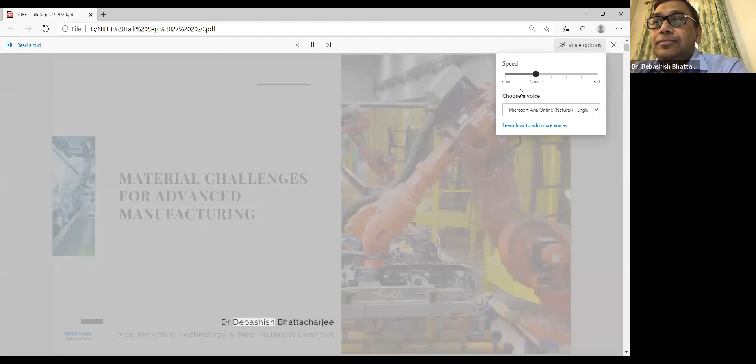Nice, I hope you can see this. Material, challenges for advanced manufacturing. Oh, Dr. Debashish Bhattacharjee. That wasn't my voice.

Yeah, we are all set to go, sir. That is okay, don't worry. Don't worry, that's the least of the problems. Okay, yeah, bye.

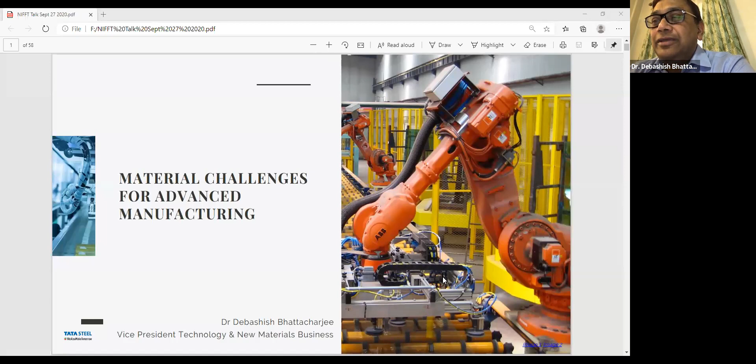So most of my coverage will be on how manufacturing, the initial part will be on how the whole chain of manufacturing is changing, because manufacturing is not for the sake of manufacturing, it is to generate wealth. And manufacturing is a part of the whole value system, the value chain that generates wealth. The first part of the talk will be to see how that whole chain, the value chain, is transforming itself.

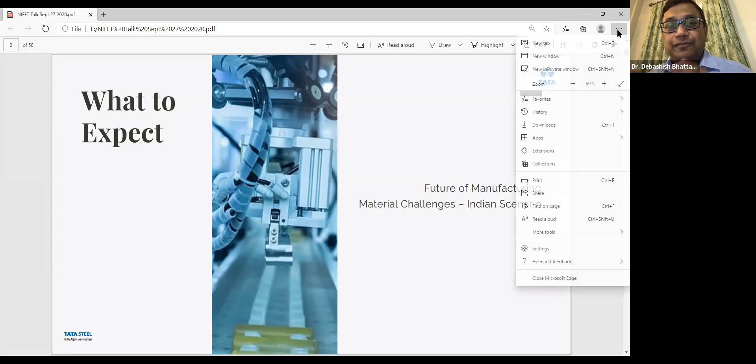And then we will go on to talk about certain specific materials and the challenges in the manufacturing, also some of the advanced materials, advanced manufacturing technologies, and the challenges specifically with reference to the Indian context. And we'll end up by talking about what we can possibly do. There may be multiple ways forward, I will just talk about maybe a few. Okay, next one please.

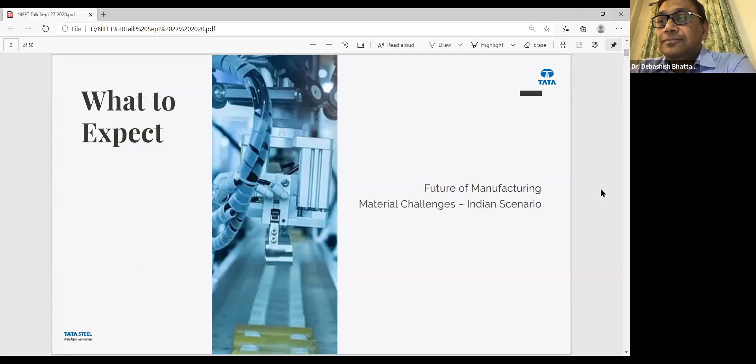Yeah, thank you. So the way manufacturing is transforming today, it can be clubbed in many ways, described in many ways, but I put it under 4 trends, 4 mega trends if you wish. The first is consumer demand itself. The nature of consumer demand is changing, and it has changed over our lifetime.

And I'm talking about people who are above 50, above 55, who started, who were young when mobile phones were not in existence. We used to wait for a couple of years before we even got a landline phone. So that generation has seen multiple transitions in the nature of consumer demand. We were happy if we got a phone connection in 2 years. Today, people change 2 phones in 2 years.

So that is one of the indicators of how manufacturing technology has changed and how consumer expectation has changed. If an app doesn't update itself every couple of months, we think probably the company is dead. The nature of products themselves are changing, it's changing in what it's offering. I'll talk a little more about it later.

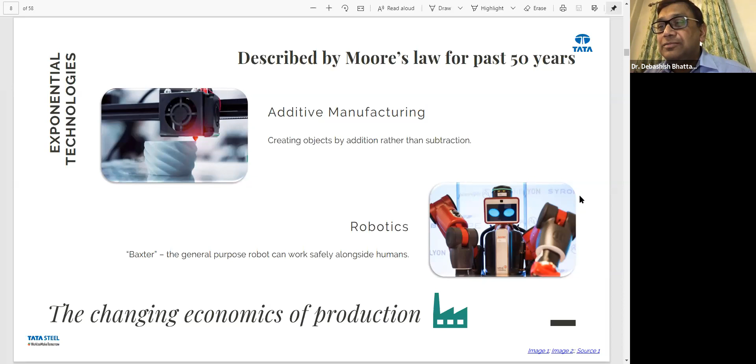And enforced by all of this have changed materials. Most of the stuff we see around us today are multi-materials, and progressively more and more advanced materials. If you take a car today, say an Audi A6 or a BMW 5, you'll see the extent of use of multiple materials has increased dramatically over the last 10, 15 years. An ambassador used to be made of basically just the skin, 2 or 3 types of steel. Today there's no ambassador, but a decent mid-range car will have steel, aluminum, polymers, composites, steels of at least 5 or 6 different grades. You'll have coated, uncoated. And this is just a car.

And if you look at the transition that has happened in telecommunication, in just the handheld telephone, the materials used inside has ballooned over the last 15 years, partly driven by Moore's law. So we'll talk about material science a little more later.

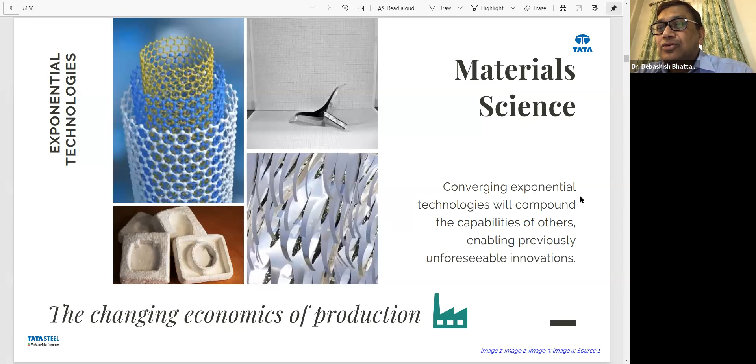And of course, all of this has been aided by internet. Although we had a problem getting into Zoom, but this is the way forward. We've seen, whether meeting amongst friends or having official meetings over Zoom or Teams, this is how people are very conveniently interacting and exchanging information. They're also exchanging information on manufacturing, where you can have a concept and design at one place, manufacture at a completely different place, in small scale or even large scale. Distances have crashed, and the production chain from concept to design to manufacture to market has transformed from what we had, say, 10, 15, 20 years back.

Next one, please. I'll give you an example of Tata Steel's own experience in the new materials business, which we started 1.5 years back. We started exploring the business 1.5 to 2 years back, and went into business 1.5 years back. Without any investment in asset, without any asset ownership, this business has grown 10x over the last 18 months. It has designed products, ridden on existing products, introduced completely new to the world products in sectors of industry, infrastructure, and railways. Having a growth rate of 10x in the first 18 months without any capital investment shows that there are now business models possible which are eroding away barriers to entry. In the yesteryears, you couldn't have started a materials production business without capital investment. Today, you can. This business is growing very rapidly today, and similar models are applicable across the group, across the globe, in multiple materials.

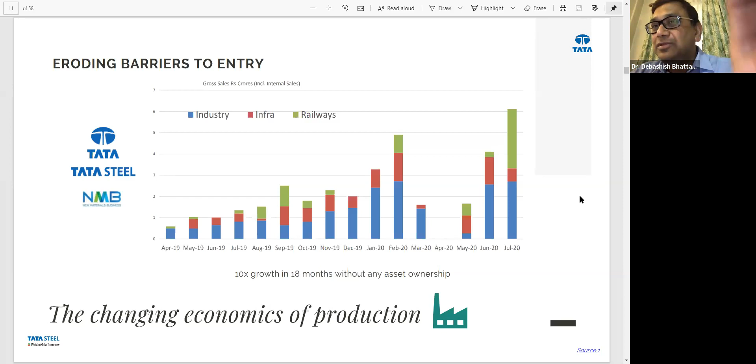So we'll now look at individual materials and see what can be done in the Indian scenario from the production and manufacturing perspective, to make India self-reliant and a world leader in those materials. Of course, the materials chosen are either of strategic nature or of a nature which would take India to a leadership position in materials that are emerging and have tremendously high applicability in multiple areas. So we'll start with titanium.

We'll start with titanium, which is a strategic material. India has the third largest ore deposit of titanium, which is in the beach sands, mostly in the southern part of India, but it works its way up the east coast. Having the third largest deposit in the world, India makes 500 tons of titanium in a plant, a plant which is owned by the government, not necessarily the central government.

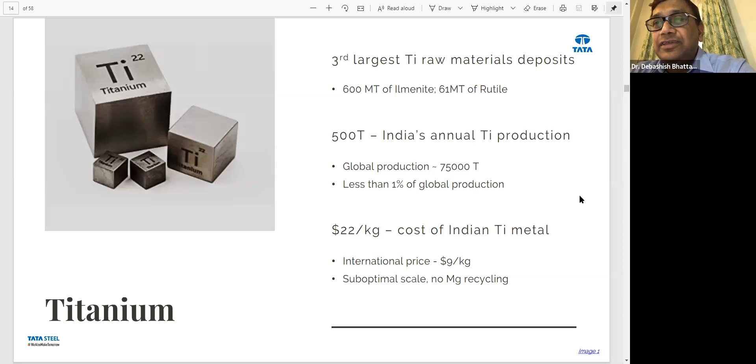And so, of course, it is driven by composites. The use of composites, especially carbon fiber composites, has gone up to about 50% in the newer aircrafts. And of course, carbon fiber famously does not go along with aluminium because there's a corrosion issue. So the choice for a metallic goes to titanium, where the demand for titanium has risen, driven by aerospace.

And if India wants to become a hub and wants to make its own military aircraft, or also civilian aircraft, maybe small versions, this is the way forward, and we need to have our own titanium, along with carbon fiber, which I'm going to talk about later.

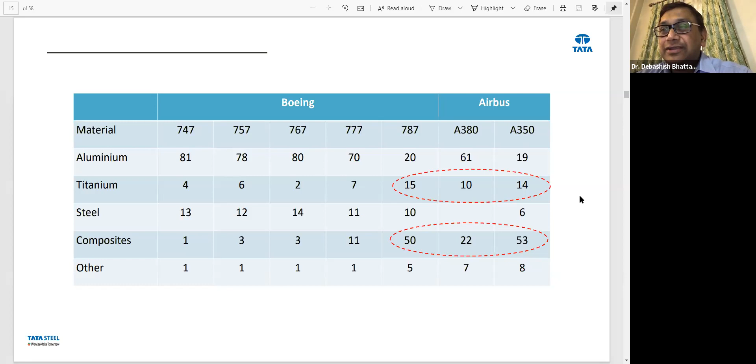Next one, please. Now titanium, of course, has this for the metallurgists here who understand the alloy phase diagrams. Like steel, and unlike most of aluminium, titanium has a very flexible phase diagram, which means that you can give titanium different properties, strengths, hardnesses, ductilities by giving different heat treatments and having different precipitates, different phase combinations.

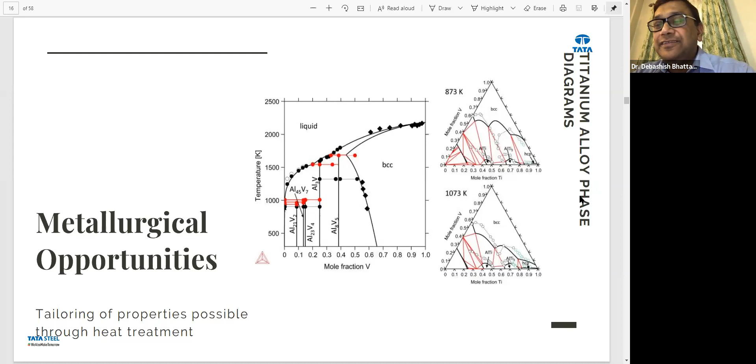Next one, please. So it's a very versatile material, therefore. But then its price has to come down through scale, through a manufacturing route that can bring down its cost of production. But for that, India needs to invest in intellectual capital, in research capital. These are some of the products that India could design, develop, and manufacture and sell to the world, either from the health sector or in the aerospace sector.

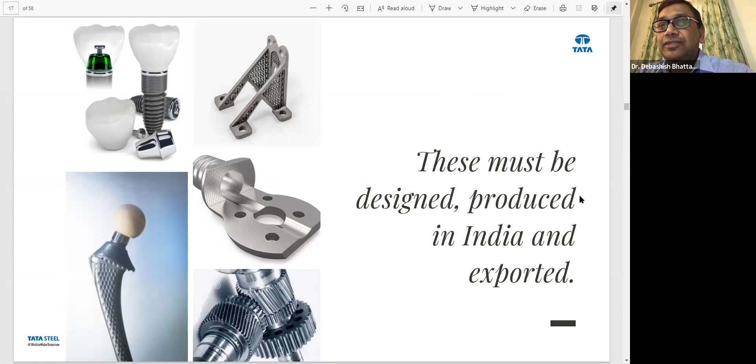Next one, please. But if you look at that value chain of titanium, you start with basic knowledge. There are hardly any academic groups in India which work on titanium. There are some pilots, and I would think a 500-ton plant is more than a pilot, it's a commercial plant, but it's not really commercially viable. It's a big pilot plant. So we have experience in running plants and pilots in titanium, but there is lack of basic knowledge and basic research in titanium. Manufacturing, we need scale.

But the whole point is that the market in India is not big enough to pull this whole value chain. The Indian aerospace and medical sectors are weak in terms of the amounts that they manufacture, that they make. So they need to pull. Therefore, our focus, in order to have a natural pull in this material, is to create the market.

Of course, creating a market in India would be difficult, would be slow. So maybe we should transform our vision from being India-centric in our market to being globally focused on the market. So we could make in India for the globe. And that is the way by which we can pull this whole value chain of titanium toward demanding more amounts of titanium, which could mean scaling up in India, which would mean requirement for qualified engineers, requirement for intellectual research and technology inputs, which would mean development of research groups in the academia.

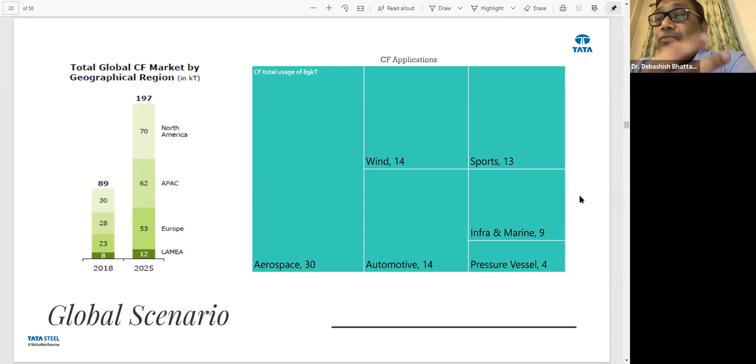Carbon fiber is another strategic material. In 2018, the world made about 90,000 tons, and with new plants being set up, it will grow to about 200,000 tons by 2025. Most of it is used in aerospace, as with Boeing and Airbus, where the whole fuselage is turning into carbon fiber.

It's also used in automotive and wind. As windmills increase the length of their blades, they would no longer be made of glass fiber. Anything above 80 to 90 meters would have to be carbon fiber to reduce weight on the bearings.

Automotive use is price sensitive, but as prices come down, uptake in automotive will increase. In my opinion, if the price of carbon fiber comes below $10, it will have significant uptake in automotive, and once there's volume uptake, there will be further decrease in price. And sports.

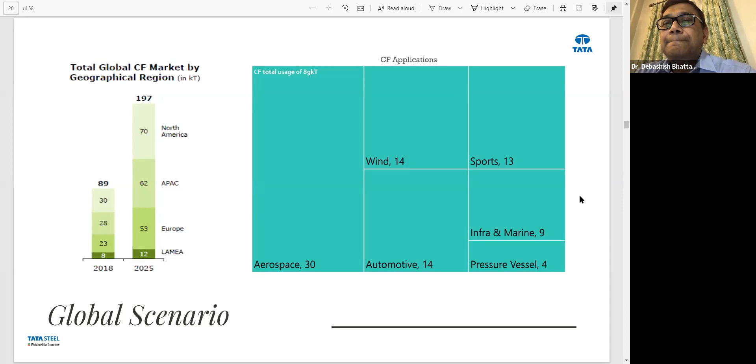If you see the Indian picture, India consumes today about 750 tons. The M is not million, it's just metric. So 750 tons out of, say, 100,000 tons globally—again, less than 1% of global consumption. That's not surprising, it's the same story as titanium.

The users of these strategic materials—our aerospace market is small, and the automotive or wind market, compared to the rest of the world, is small. Most of the wind blade lengths we use are sufficient to be designed and manufactured in glass fiber. So overall, this material's consumption in India is less than 1% of global consumption.

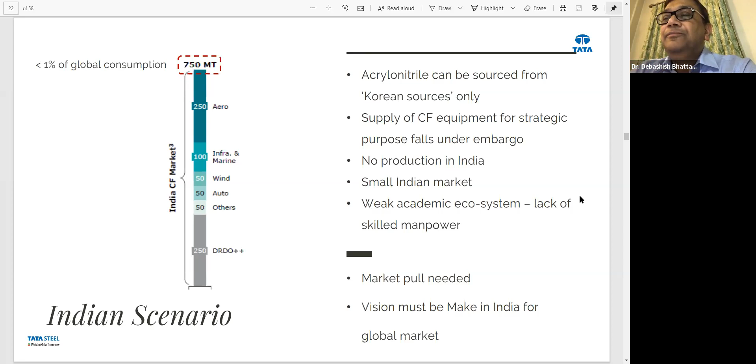With this sort of market in India, there's no way we can have large-scale production, or any company setting up large-scale production for the Indian market alone. So the answer here is that if we want to be self-sufficient in this strategic material in a self-sustaining way, we need to create the pull—partly by manufacturing aircraft components in India, increasing manufacturing of aircraft in India, or treating the globe as our market.

India has certain inherent disadvantages in this material. One key issue with traditional carbon fiber is that it uses acrylonitrile, whose raw material is mostly imported, although it can be made from petroleum as a byproduct, but it has some specific sources. Our academic support system in this material is also weak.

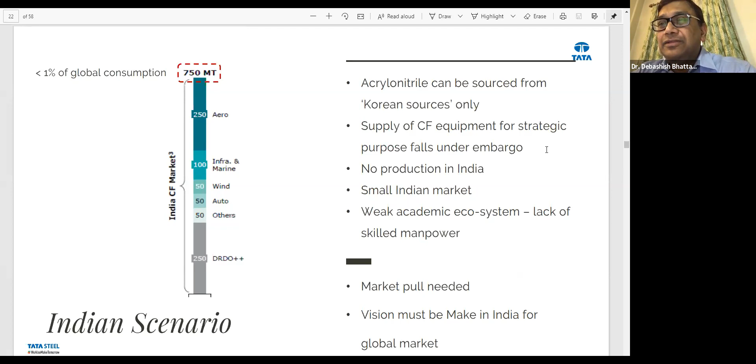There are various levers India can use to address carbon fiber and be globally competitive. The largest part of the cost of carbon fiber is in the polyacrylonitrile, PAN, the raw material. There's also a power cost and a manpower cost. On PAN cost and manpower cost, India should be able to create a differentiation. Let me talk about PAN.

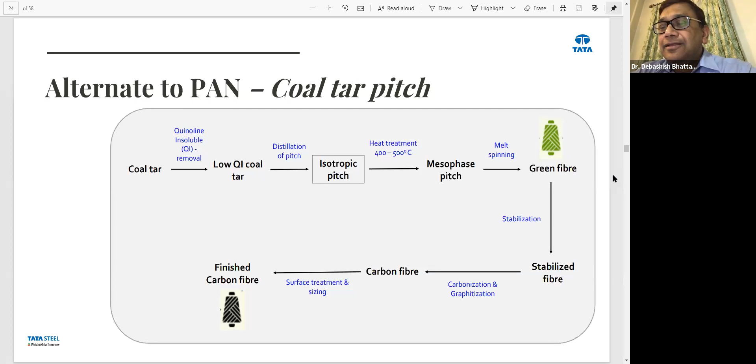A big issue in composites is recycling. There are technologies which India can adopt, adapt, and develop for reusing and reclaiming carbon fiber, either from unused prepregs—pre-resin impregnated fibers—by chopping them into small pieces and giving them an in-mold treatment to make products for automotive, railways, and other sectors. If we master this technology, we can be a world leader in an area that's really waiting for leadership in recycling of composites.

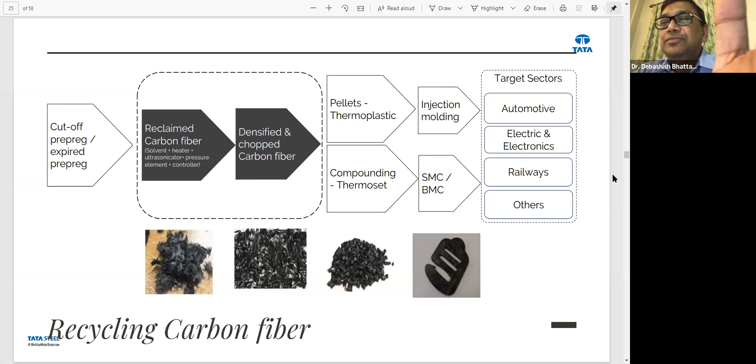These are some of the components which can be made from recycled carbon fiber. You can make automotive seat backs, car hoods, oil pans, or sandwich panels. These need not always be exposed surfaces—they can be internal surfaces with the same strength and lightweight properties you'd need, but at a much lower cost. So we could use recycling technology to our advantage to make carbon fiber products at a price point that can lead to a large market for carbon fibers.

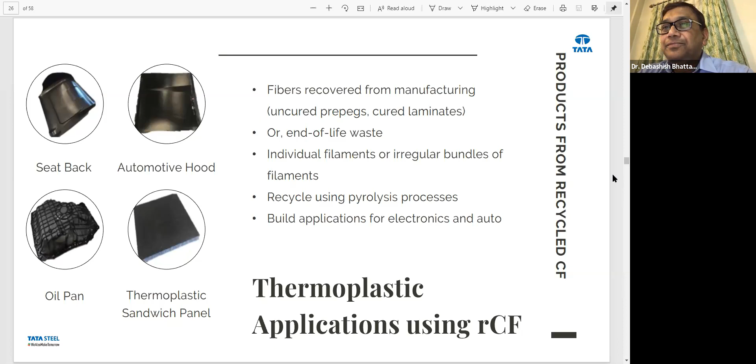If you look at the same value chain of carbon fiber as we showed for titanium—basic knowledge—there's hardly any group in India working on the fundamentals of carbon fiber. There's a pilot plant available only in NAL, Bangalore, and that's been there for a couple of decades, trying to get hand-holding from industry but not very successfully. There's no big manufacturer in India of carbon fiber. It's not that attempts haven't been made, but they haven't succeeded, and one of the biggest hindrances is the lack of market. Again, the same story as in titanium—we need to think of the globe as the market, and then see how that market pulls and how we can create a manufacturing base in India that enables us to make this very strategic material.

Let's touch upon magnesium, another strategic material. 85% of the world's 1 million ton production of magnesium is from China, and it predominantly uses the Pidgeon process, which is environmentally unfriendly. It guzzles energy and is a process that many countries wouldn't allow simply because of its adverse environmental footprint. But lo and behold, 85% of this material comes from only one country.

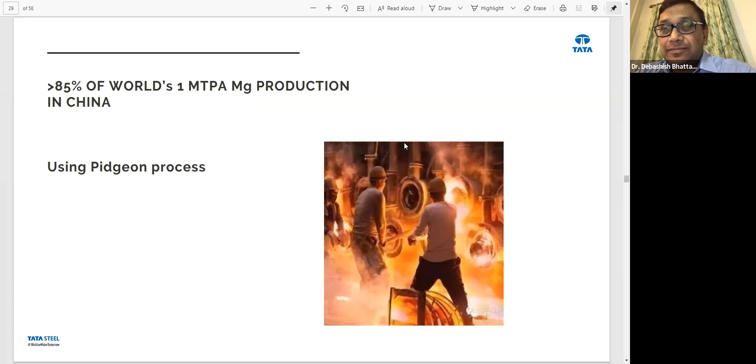There's an opportunity for India to take leadership in this. We need to innovate and find ways of using local materials. India has a strong ferroalloy industry, and the ferrochrome and other ferroalloy slags have a large amount of magnesium oxide. This magnesium-bearing slag can be treated while it's still liquid, so you preserve the heat and don't need to reheat it, and distill out the magnesium under vacuum, giving you high quality magnesium—I'm sorry, I may have said manganese in my talk, I meant magnesium. You distill the magnesium from the slag while it's hot, getting magnesium with a minimum pollution footprint. It needs no calcination and hardly any additional heat, since the slag comes out at about 1600 degrees centigrade—it only needs vacuum for the distillation. This technology is being tried out today at pilot scale.

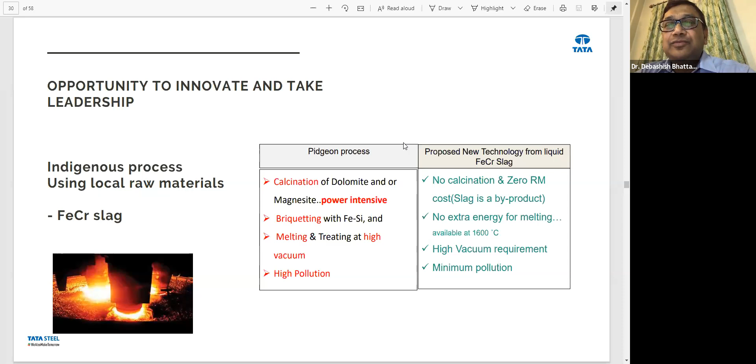Additive manufacturing. Next one, please.

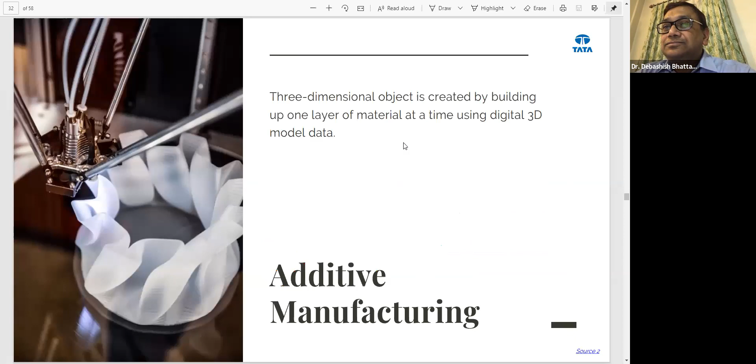This is an area that has been growing almost unnoticed. People have been talking about it, not many really knowing what to do with it, till General Electric took it up in earnest and created fuel nozzles for the LEAP engines, and that was really successful in creating reliability and downscaling the engines to the sizes required. Lo and behold, the largest activity in 3D printing is in Northern Europe and Northern America. Of course, success leads to success, and you can see that over a period of 7-8 years, the total market

3D printed objects has ballooned from roughly $1 billion to going to be around $26 billion this year or next year. That's a huge increase, and by all measures, additive manufacturing is here to stay. It will become competitive. Go to the next slide, please.

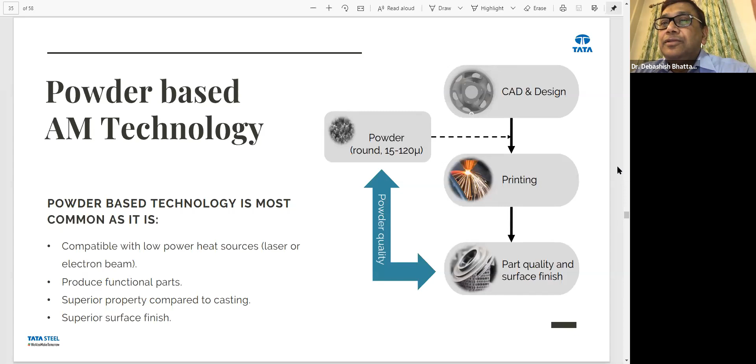Next one, please. So it is important. This I've covered. Next one, please. I'll talk about it later. So we'll go to the next slide.

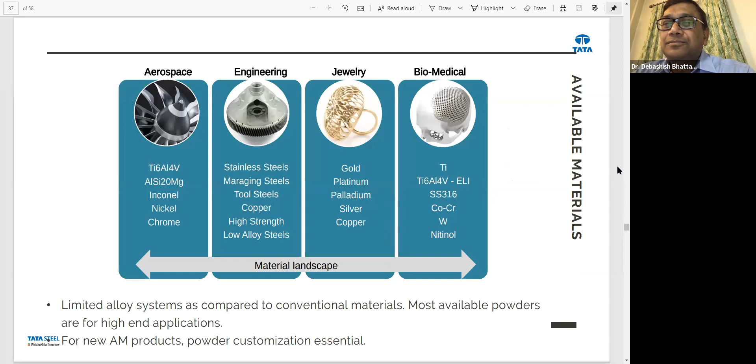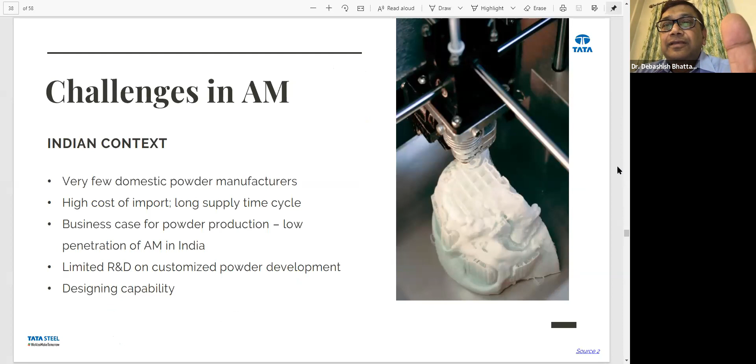Yeah. So in the Indian context, there are very few domestic powder manufacturers. We need to be strong in this. We're today dependent on high-cost imports, on long supply chains, depending on the supply times that are dictated to us mostly by the machine manufacturers. Because again, the volume of additive manufactured products is low in India, the business case for powder manufacturing is perhaps not high. And again, the same value chain effect means we are limited in R&D and customized powder development.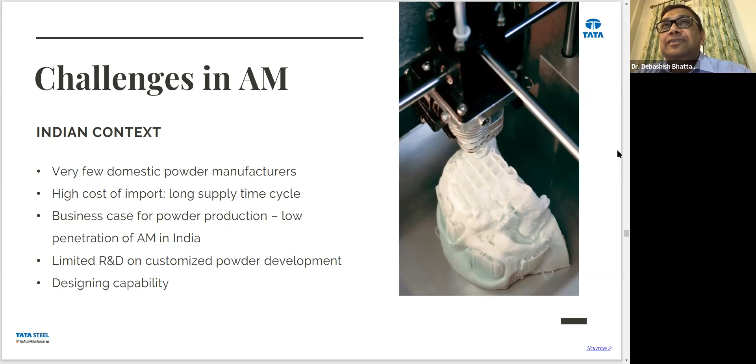Added to the fact that there is a huge need for developing our design capability in additive manufacturing. The understanding of material behavior in additive manufacturing, which is an R&D issue, will have to be relearned in a way compared to usual subtractive manufacturing. How you test a near-net shaped product for certification, how you assess the integrity of the product in a live supply chain, how you ensure the right surface quality for every product, and so on. And of course, how you ensure optimum use of material, and how you design a complicated component from a 3D development perspective, is a strength that India needs to develop. Next one, please.

I think this can be done not only by academia, but by incentivizing industry to be world-class in production of powders and attaining design expertise. Most of these industries will not be the big conglomerates, but MSMEs and slightly smaller scale industries, which will be nimble in their approach. They could set up powder spray manufacturing facilities with design capabilities in a nimble way, working with OEMs and consumers. But they need to be incentivized, because this sector, although very innovative, cannot invest in new technology or R&D due to their size. I think government, as well as institutes like NIFT or the CSIR labs, have a huge role in creating this ecosystem and building the necessary capabilities in the MSME and small to medium industrial sectors. By small, I mean not very small, but not the big conglomerate either - the big conglomerates can take care of themselves.

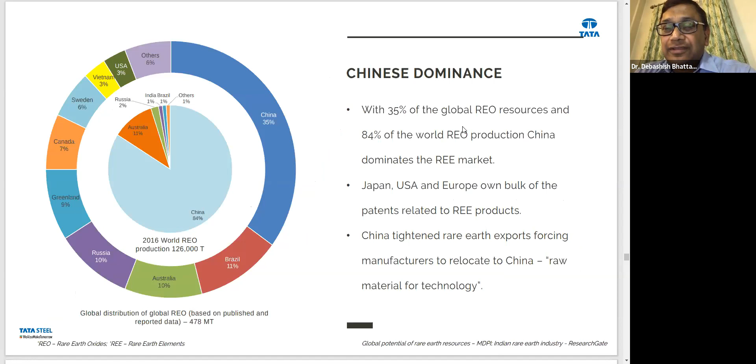And there is, lo and behold, Chinese dominance. Although it has 35% of the global resource, 84% of the world's rare earth oxide and rare earth elements are produced in China. Although most of the bulk patents and developments have happened in Japan, US, and Europe, China has a stranglehold.

Because of their excellent electronic, magnetic, and catalytic properties, rare earths are mostly used in catalysis, magnets, etc. As we see growth in the number of electric vehicles, and this is the way forward for the whole world - it's a one-way street - electric vehicles will become the dominant mode of transport across the world. The use of magnets in small motors, at the wheels or wherever, will become more and more prevalent. Also with the use of more and more handheld devices, the use of rare earths will become more and more prevalent. There is clearly an increasing market for rare earths.

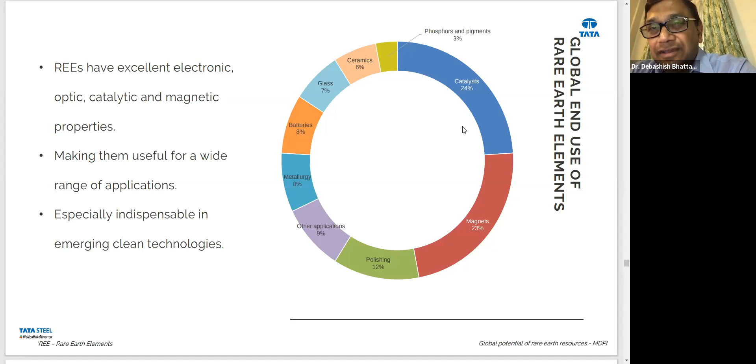So where is India in this? If you look at the India story, India has a few of the rare earth elements, monazite for example, but very little manufacturing capability. India has the capability to beneficiate rare earth materials, but once it comes to making the element, from the element to a component, India has a huge gap. Going forward, rare earths are so strategic that India really cannot depend entirely on imported rare earth materials.

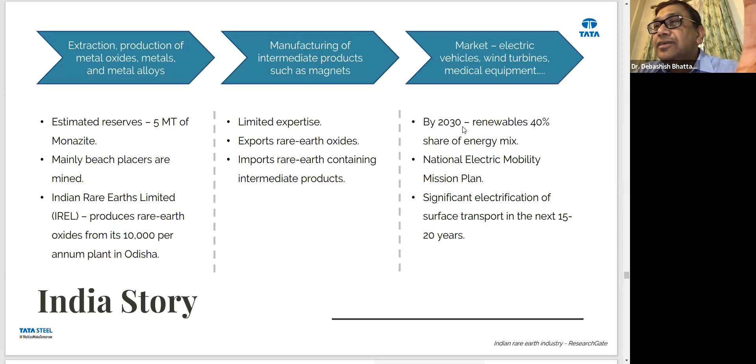We need to have public-private partnerships to address these gaps - the oxide to metal gap, as I mentioned, India has the capability for beneficiation, but it's the oxide to metal, the metal to magnet, and then the recycling of rare earth elements. These are so precious, we can't afford to throw away rare earth metals at the end of life of the gadgets. It is in this recovery of rare earths from e-waste and the recycling of rare earth elements where a huge focus must be put. I know that National Metallurgical Lab has technology for this, and I think it won an award only yesterday for its rare earth activities.

Similar story with energy materials. As we move away from use of oil to use of batteries, and electric vehicles is a one-way street - no puns intended - more and more electric vehicles will be on the road, that's for sure. Therefore, the battery materials needed for electric vehicles will be increasing in demand - cobalt, nickel, manganese, lithium, etc. - and most of these are predominantly imported.

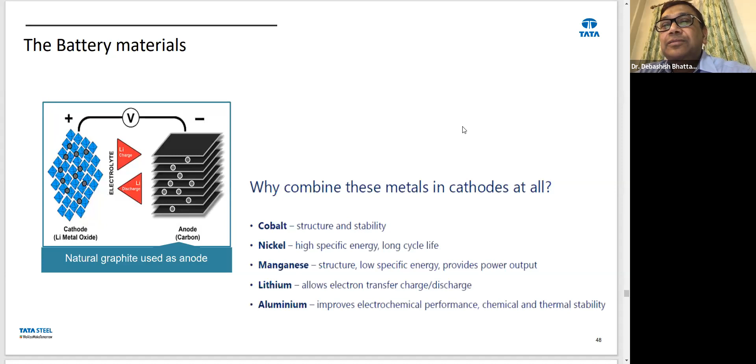So we are, in a way, moving from one imported source of energy, which is oil, to another set of imported materials for energy. So going from oil to lithium, nickel, cobalt, which are imported from Congo, China, etc., and needle coke for the anode, which is mostly imported from China.

And again, it is really up to us to develop indigenous technology for development of even say needle coke. Needle coke comes from, can come from coal tar. I mentioned coal tar before in the context of carbon fiber. Needle coke can come from exactly that source.

And India has 100 million tons of steel, which will grow to 300 million tons of steel. So the coke ovens will increase, so the amount of coal tar will increase. So it is important that India develops for itself a needle coke technology indigenously. And that will serve in a big way the battery industry for the future.

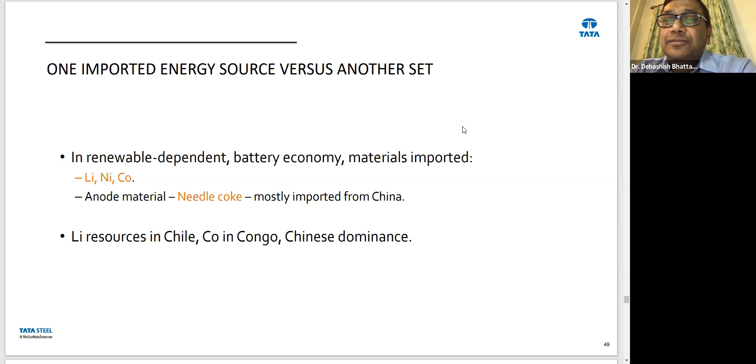Next one, please. The lookout for battery materials could be India-based. There are lateritic overburdens. For example, the chromite ores that we have in Orissa have nickel and cobalt in the overburden, which we can develop technologies for, and I'm sure along with IMMT Bhubaneswar and other institutes who have been working on this for several years, we could accelerate those programs and take them to pilot scale and then to semi-commercial scale, either hydrometallurgical route or pyrometallurgical route, for extracting nickel and cobalt from the overburden material.

We have lots of manganese ore in India, again in the Orissa belt. Purification of manganese ore - I don't think I'm showing that slide today - where we can see that across the world, battery grade manganese is predominantly made, surprise surprise, in China. And there is no reason why we can't have a technology which takes our manganese ore and purifies it to battery grade manganese. And these are some of the initiatives that we as Tata Steel have taken for future addressing these very important materials for electrification and clean energy routes.

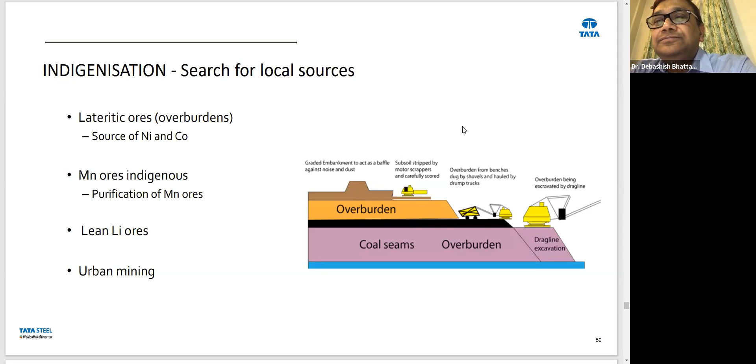I'll finish off by giving an example of a completely new material, which from a materials perspective is young. It's only about 10, 15 years since it got the Nobel Prize. It's a material with a lot of promise. Worldwide, there is a lot of activity, and large-scale use is still to be found. But this is an example of how we can work indigenously in India to develop global leadership. So let's go forward, please.

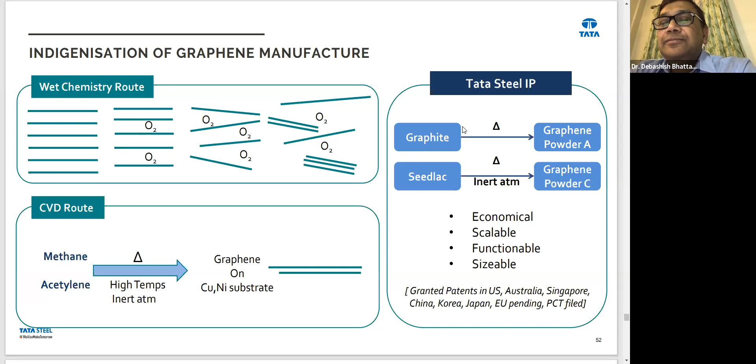So we have used graphene in the beneficiation circuit in screens. We've used them in conveyor belts, in hybrid idler rolls. Next one, please.

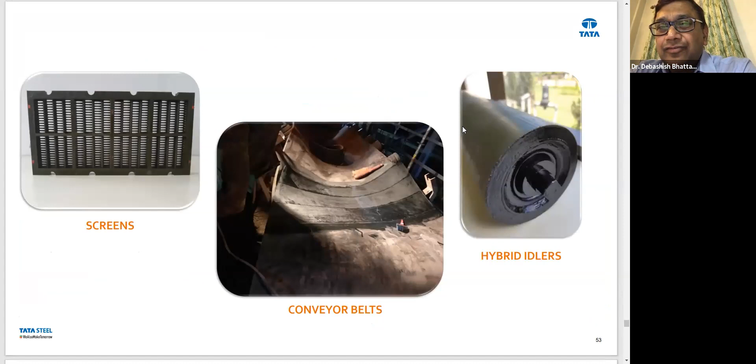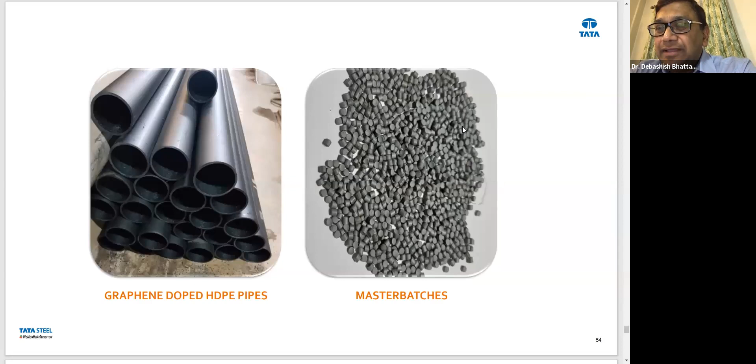In graphene doped HDPE pipes, we have put graphene in master batches to be used in rubber or in other products. We used graphene as a coating on steel. This is a superlink, which you might have seen as a caging device that goes around rebars. We have used graphene doped powder for coating on tubes, and have graphene in aerosol to be sprayed along various components to give them corrosion protection, hydrophilic or hydrophobic properties, etc. Next one, please.

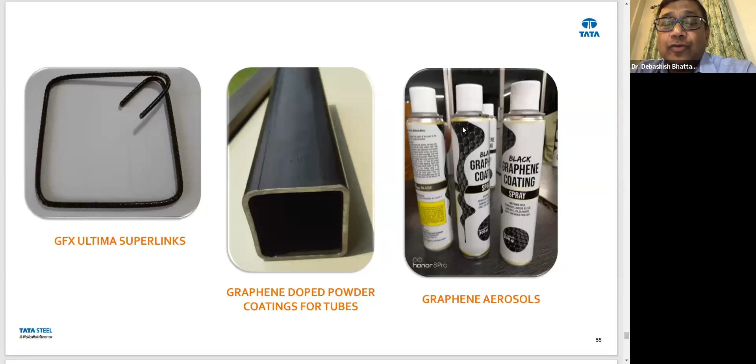So in summary, graphene is a story which is entirely Indian. We, as Tata Steel, are putting up the world's largest graphene production plant, which is about 100 tons per annum. 100 tons of graphene is a lot of graphene. And it's coming up in Jamshedpur. Given the COVID situation, it should have come up in December. It may take a few more extra months, but watch this space. So I'll finish with this summary.

If we look at the strategic materials and their manufacture and the position of India in the world, and the ambition that India needs to be self-sufficient and take a leadership position, we need a policy framework to be created to promote market for advanced materials.

And this policy framework could be encouraging companies to go worldwide with their products. India should see itself as a manufacturing hub for the entire world.

Encouraging through funding collaborative technology development between industry, government, academia, and very importantly, MSME. MSME really is the backbone of innovation in the ecosystem. They are nimble, they can focus on individual products, but they don't have the economic might to invest in R&D. The ecosystem must help them to do that, and it's for the benefit of the ecosystem.

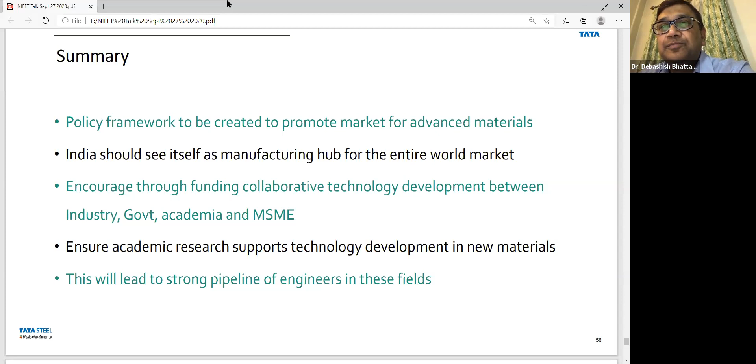And I'll finish with this picture, which is a picture of collagen, which is the protein building block of the body. This will also be the building block of our nation's industrial footprint. It's a triple helix, not the double helix of DNA. This triple helix of government, industry, and academia.

But unlike the double helix, which is autonomous and dictates the rest of the organism, the triple helix doesn't dictate. It needs to be dictated upon. So we have to find who leads in this triple helix. And I leave that as an open question, but there needs to be a leader of this triple helix to make the triple helix work. But that the triple helix is needed is beyond question.

Thank you very much. Thank you for listening.

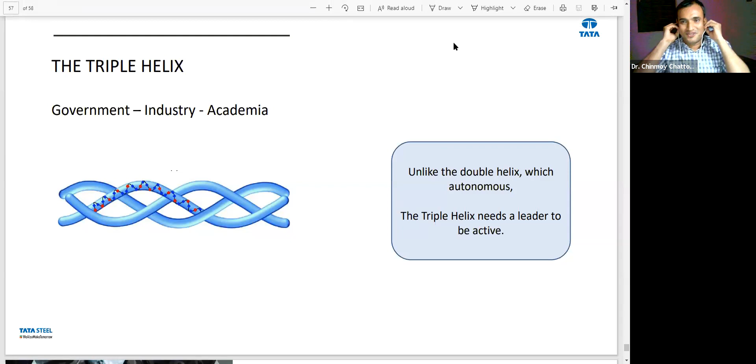Sir, thank you for your outstanding and engaging talk. We have two questions already from our audience. So can I raise that to you? Yes, please, of course. So first question, Mr. Sasank Srivastava is asking: kindly enlighten the challenges related to metal foams and MMC, especially related to lightweight structures.

Yeah, sure. Can you put the next question also? So that next question, Mr. Ansuman Vez is asking: is sustainability lagging behind in the race of new technologies?

Sustainability, yeah, okay. So I'll take the first, metal foams. Yeah, so definitely metal foams is a way forward for lightweighting. I think you mentioned lightweighting in your question. But as the world has gone forward, there are many ways of getting to the same lightweight. Right? Metal foam means you still have to melt a metal, which means you have to precede that with a beneficiation step. You have to melt a metal.

You then have to make sure that it has a foaming activity, and the foam is uniform in size. It will be open pore or closed pore, depending on the usage. And it has to be ductile. It has to suit the purpose and be formable.